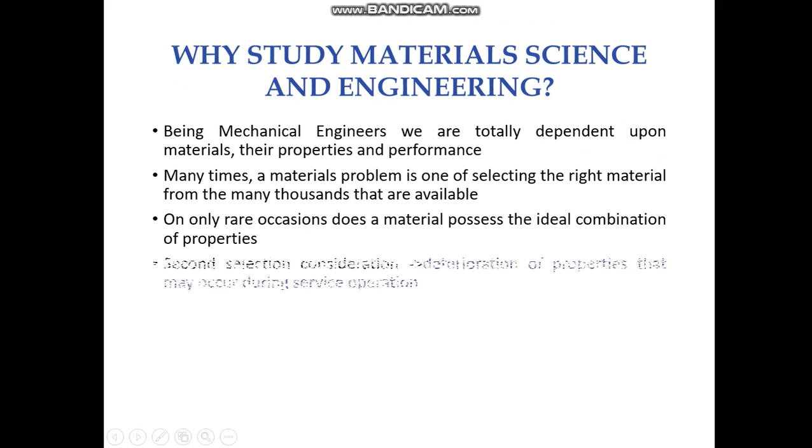In the introduction part we will talk about the relationship between materials and civilization, the relation between material and engineering, the effect of materials on properties and performance, and the different types of materials. Let's start with materials and the relationship between civilization.

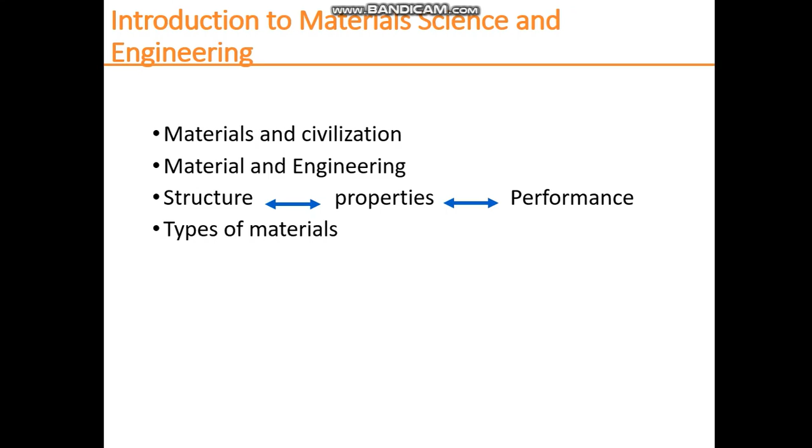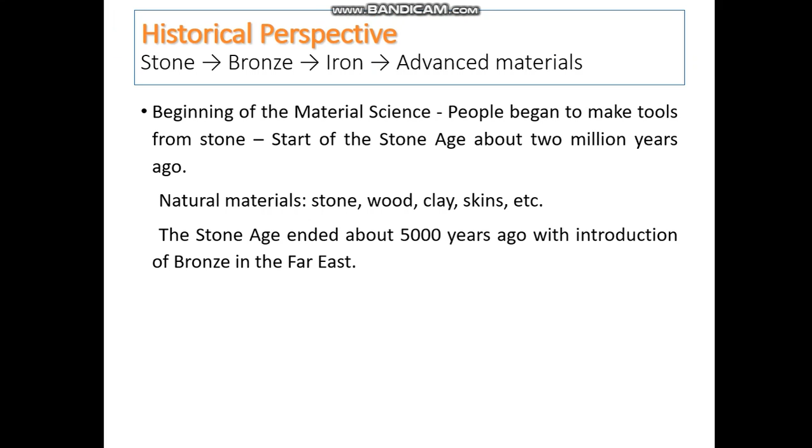From the historical perspective, materials were introduced with the start of the Stone Age. The beginning of material science, people began to make tools from stone. The Stone Age started about 2 million years ago. At that time, the natural materials were stone, wood, clay, skin, etc. The Stone Age ended about 5,000 years ago with the introduction of bronze in the Far East.

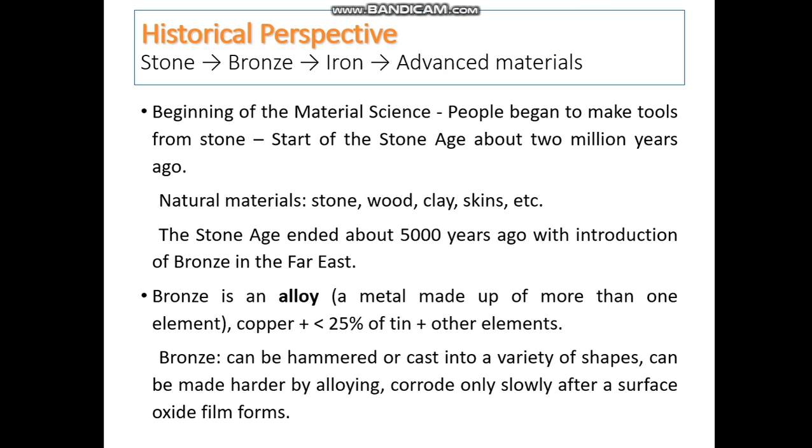Bronze is an alloy, a metal made of more than one element. The base metals were copper and tin and some other elements. Bronze can be hammered or cast into a variety of shapes, and can be made harder by alloying, corrodes only slowly after a surface oxide film forms.

The Iron Age began about 3000 years ago and continues today. So after the end of the Bronze Age, the Iron Age started. The use of iron and steel, a stronger and cheaper material, drastically changed the daily life of the common person.

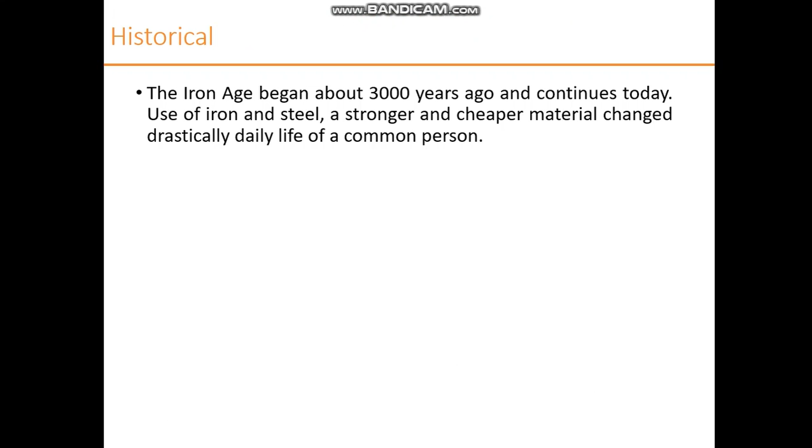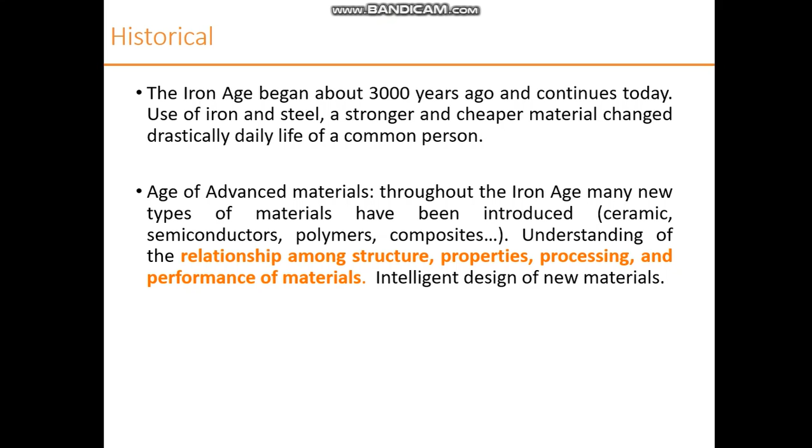In continuation to the Iron Age, advanced materials were also introduced. Throughout the Iron Age, many new materials have been introduced like ceramics, semiconductors, polymers, composites. The understanding of the relationship among structures, properties, processing and performance of materials leads to the intelligent design of new materials.

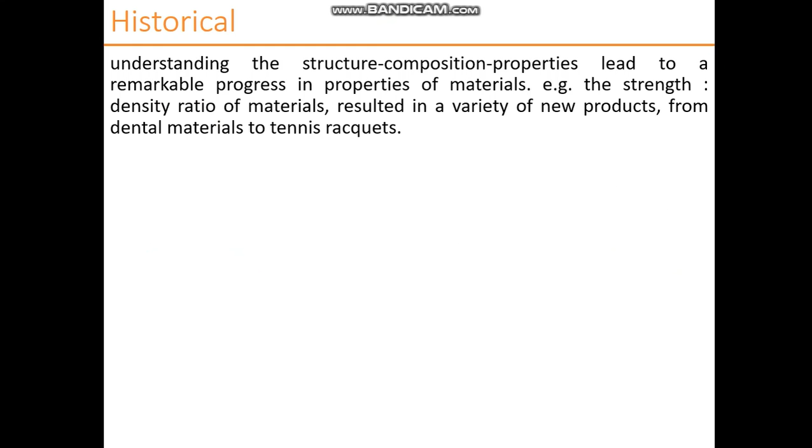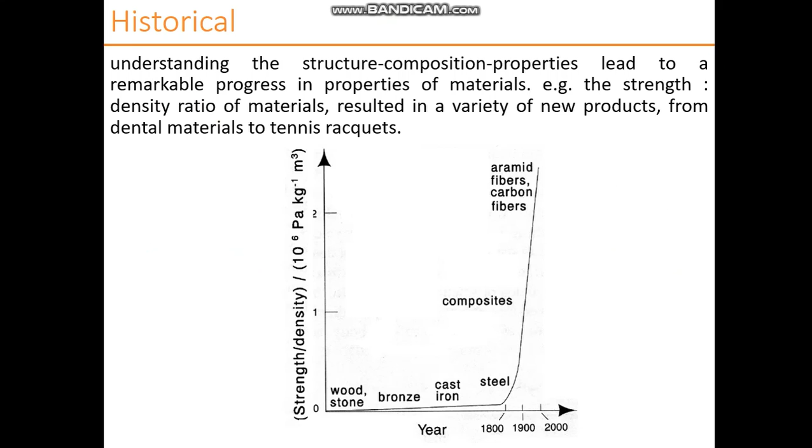So what is material science and engineering? Material science is the investigation of the relationship among processing, structure, properties and performance of materials.

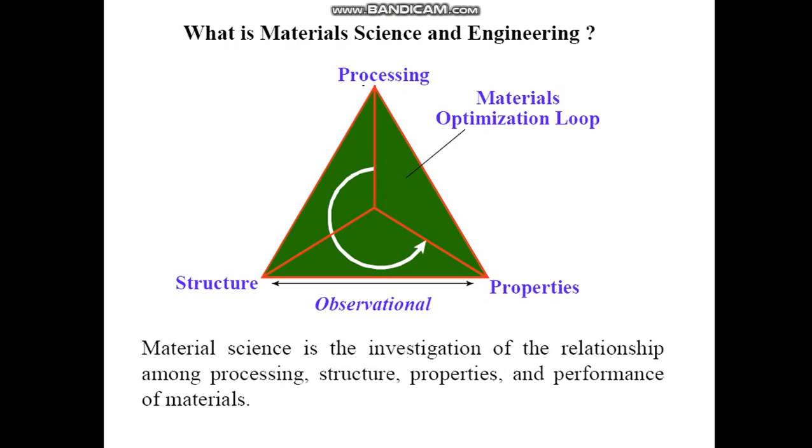Materials are an integral part of human culture, as seen in the past stone, bronze and iron ages. So what is the role of the engineer? Adapting materials and energy to society's needs.

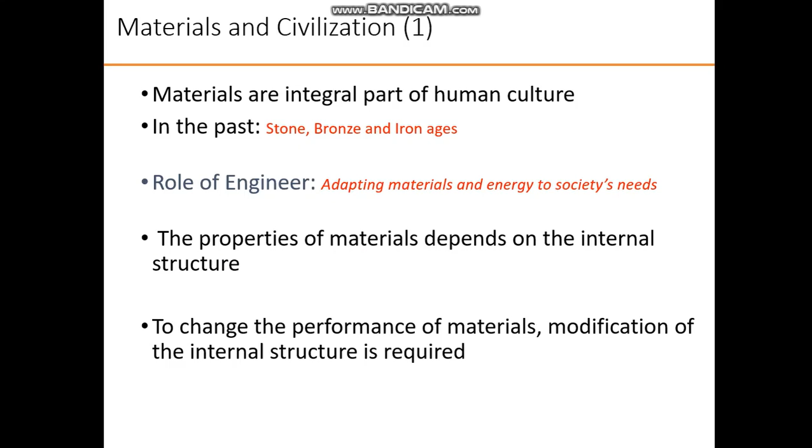The properties of a material depend on its internal structure. To change the performance of materials, modification of the internal structure is required. Humans are able to make things like objects, tools, and component systems, and this requires materials to meet these purposes.

These days we are not limited to one predominant material. There are a lot of sophisticated materials like plastic, silicon, titanium, high technology ceramics, optical fibers, and so on. So we can say it's the age of technology.

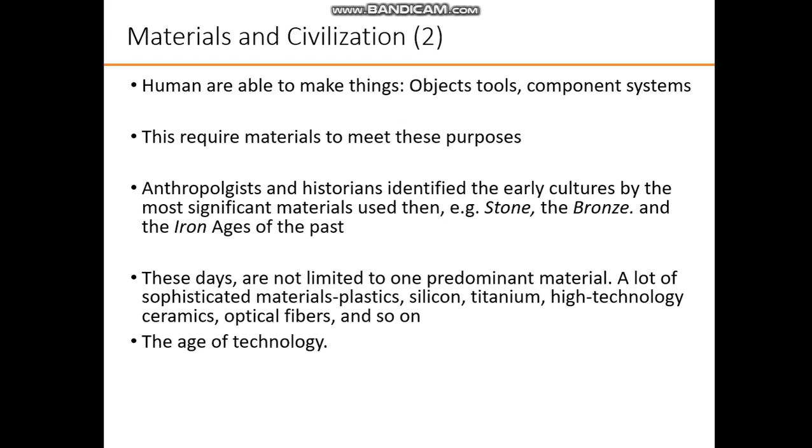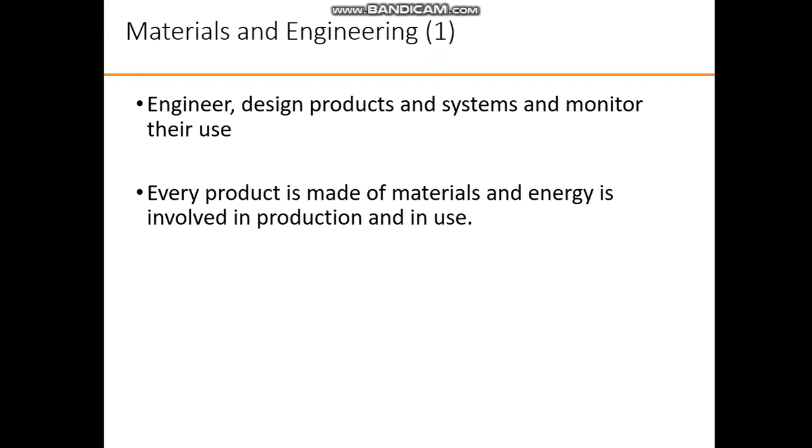Engineers design products and systems and monitor their use. Every product is made of material, and energy is involved in the production and use of that product. This is why all engineers have to study material science during their undergraduate study.

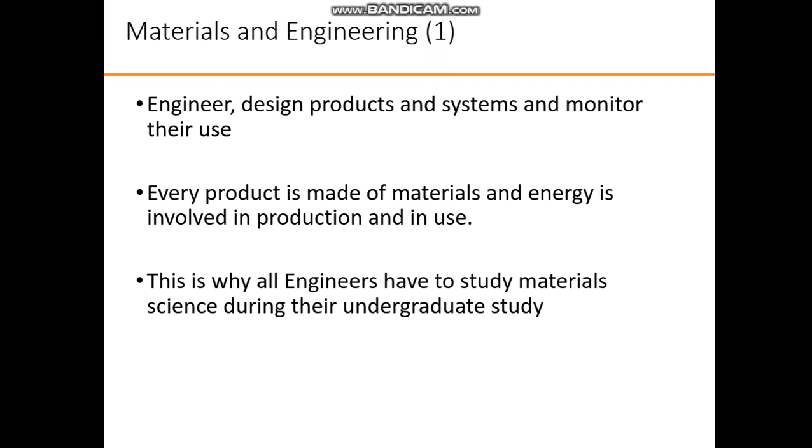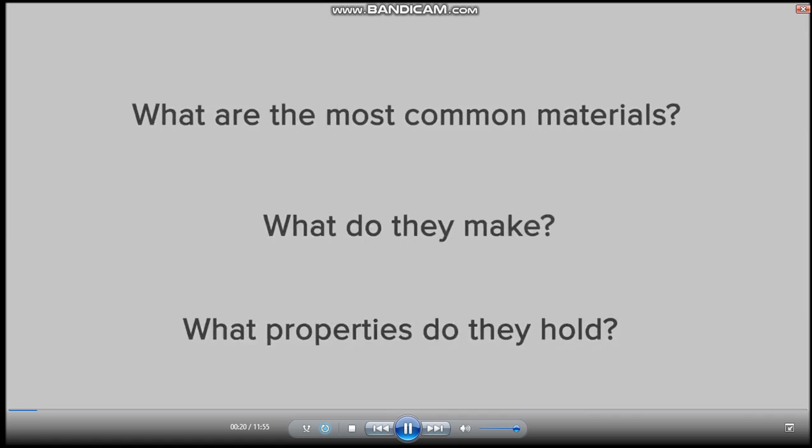Materials are all around us. We use them in our everyday life. But what are the most common materials? What do they make, and what properties do they hold? These are the key insights we will try to uncover in this module. For engineering purposes, materials can be divided into 4 key areas.

The first is metals. Metals are the most widely used of the 4 materials. Even if a material is not made of metal, metal will have been used at some point during its manufacture. Metals are used for everyday objects like cars, buildings, and bridges, but also go into extreme applications like jet engines, mining equipment, and space exploration. Even the tallest buildings in the world are only possible due to metals.

The second material is polymers, which includes plastics. Polymers are widely used in many different industries. Natural polymers consist of amber, wool, silk, natural rubber, and cellulose, which is the main constituent of wood and paper. These natural polymers have been used for centuries. More recently, synthetic polymers have been produced, and these have revolutionized modern society, including synthetic rubber, nylon, PVC, polystyrene, silicone, and many more.

The third is ceramics. Ceramics have been used for thousands of years, and the most common two are glass and clay. Clay was the first material that we learned to transform into another state using fire. This was done about 29,000 years ago, when clay was formed into decorative figures. Much later, clay was used to form items like jugs and bowls. Glass, mainly made from sand, was mastered by the Romans, who unlocked the secret of blown glass by mixing it with minerals. The Romans were the first people to use glass for windows.

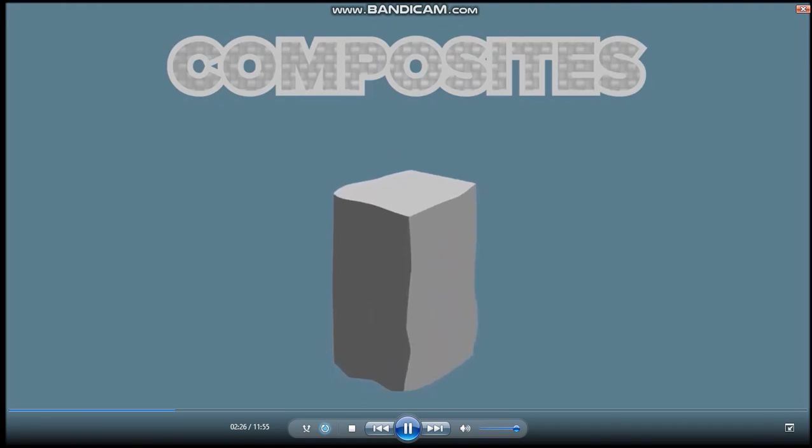The fourth material is composites. A composite is a combination of 2 or more materials. Composites have been used for centuries in the form of concrete, and again it was the Romans who really mastered the process. In text from 25 BC, different aggregates are discussed for use in lime mortars. In 1853, steel bars were first added to concrete, making reinforced concrete one of the most widely used composites.

Metals can be divided into 2 subgroups, ferrous and non-ferrous. In ferrous metals, the main constituent is iron, and this group consists of steels and cast irons. For the amount of strength achievable in steel and cast irons, it is a cheap material, because iron is one of the most plentiful elements in the Earth's crust.

Non-ferrous metals include any other metals. Some examples are aluminium, copper, zinc, titanium, and nickel. Metals have good electrical and thermal conductive properties. They are ductile, strong, tough, and have strength at temperature.

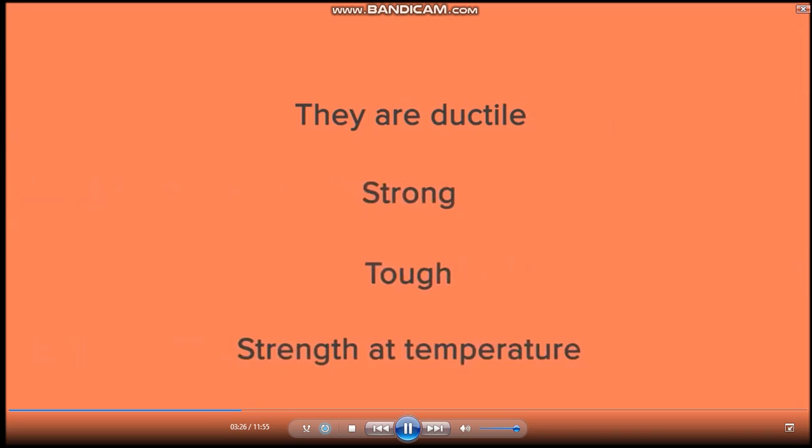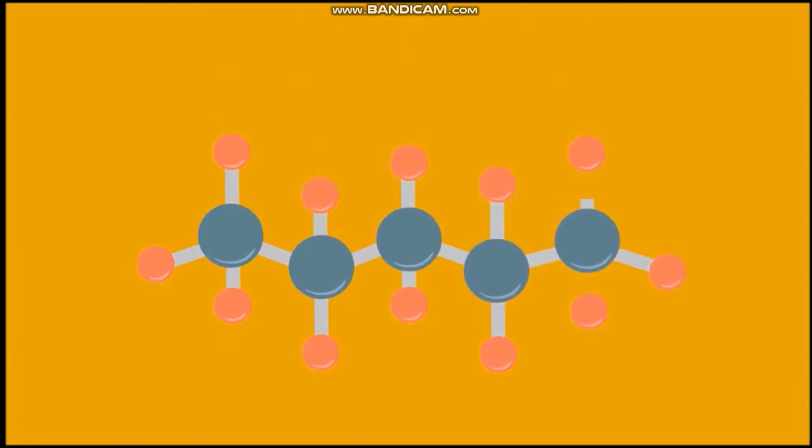Polymers are organic carbon-containing molecular chains. They have a wonderful array of properties and are primarily made up from hydrocarbons, which are the building blocks of plastic. Hydrocarbons are a byproduct of the petroleum industry, and due to this they are abundant and therefore a cheap material. The carbon and hydrogen which make up the plastics are key to how they work, because they can form together to produce long chains, which enables plastics to be versatile and easily processed.

How the material is processed can produce the desired combination of properties. The strength can be varied, the toughness can be varied, they can be a good conductor of electricity, and are often very good insulators.

Again, ceramics can have a wide array of properties, and in recent years we have really begun to understand them. Superconductors have been produced which, when cooled, have virtually 100% efficiency in electrical conductivity.